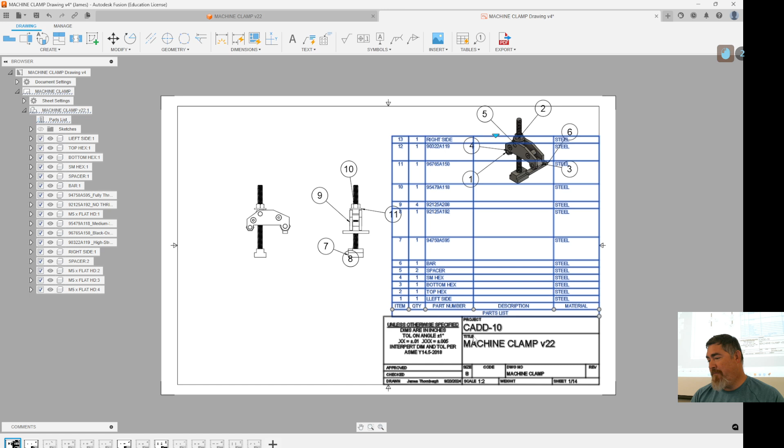But sometimes if you make your drawings first before you fix your components, your table ends up really big like this. So just click on it, grab the arrow on top, drag it down and drag it back up.

Then move this over a little bit and it'll collapse back down. Either that, or when you pick it, you have to pick on the line, make a new table, drop it in, and add that description column back in, and it'll scale back down.

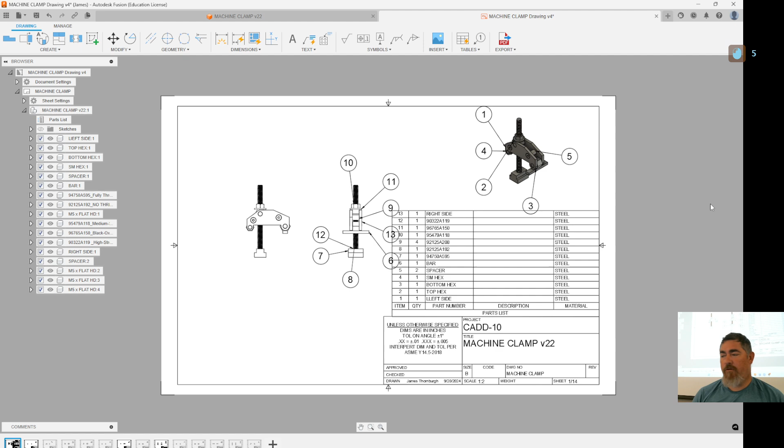So what are these little balloon things here? Those are, I think, the items. Yeah, so it's this item number and it's telling you where that thing is in the assembly.

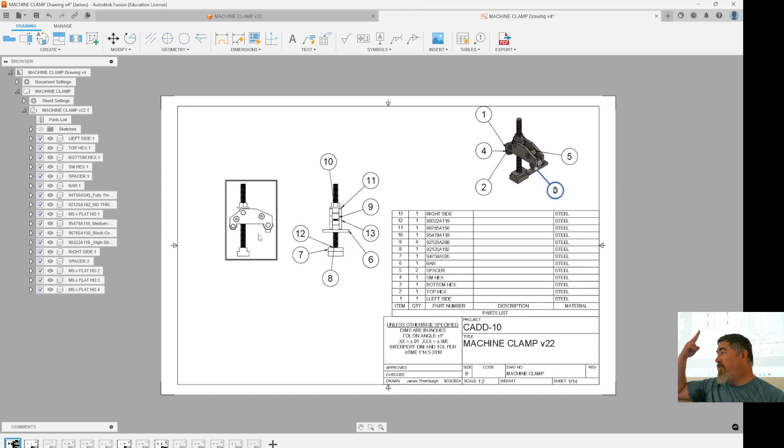And so we want to be able to see kind of an isometric to see what's going on with the part. Then over here, we also need the multi-view so we can see overall height, width, steps. So we need probably at least 2 views there. Maybe not that one, maybe this view.

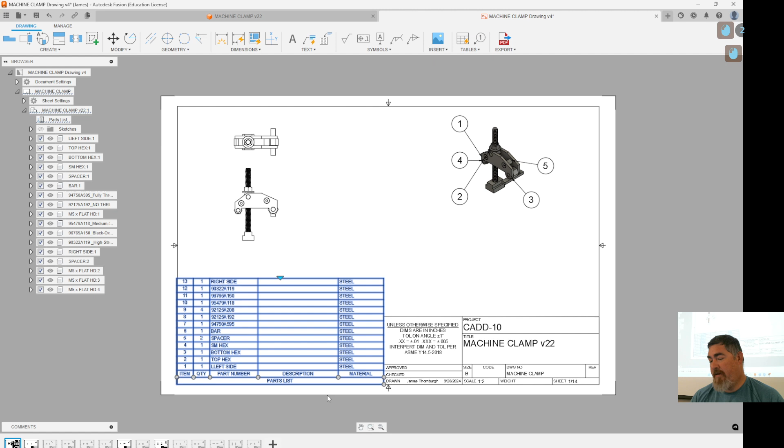I can stick these over here. But right now this is really small, stuck up there. I could also move these up here and drag my parts list down into here. I can stick it down there. Now I have more space for this.

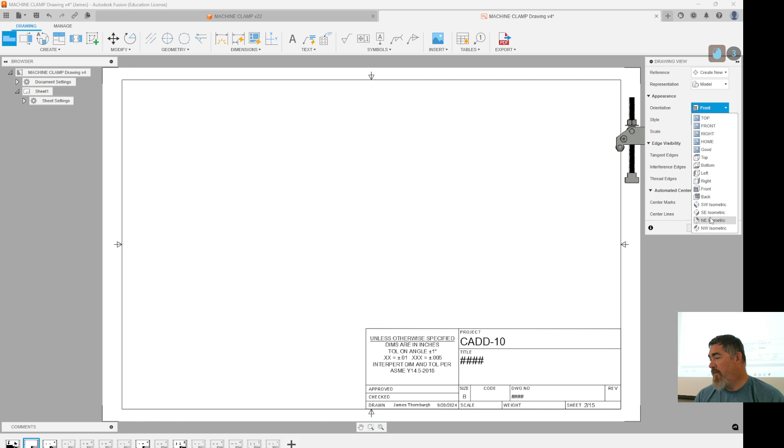I can also split these up, doing one page of just these views and another page of the isometric. Both pages would need to have the parts list though. So I could add a new page, drag it over there, do a new base view, and tell it I want only the isometric. Now I can make the scale bigger.

Put in my table. So now I've got a lot more space to work with.

So what was one of the problems you guys found when you were working on this with identifying your parts? So you have turned in your drawings.

Yeah, so it's hard to see some of these parts, right? You can't see these parts back here. You can't see what's going on over there. You can't see this bottom screw at all.

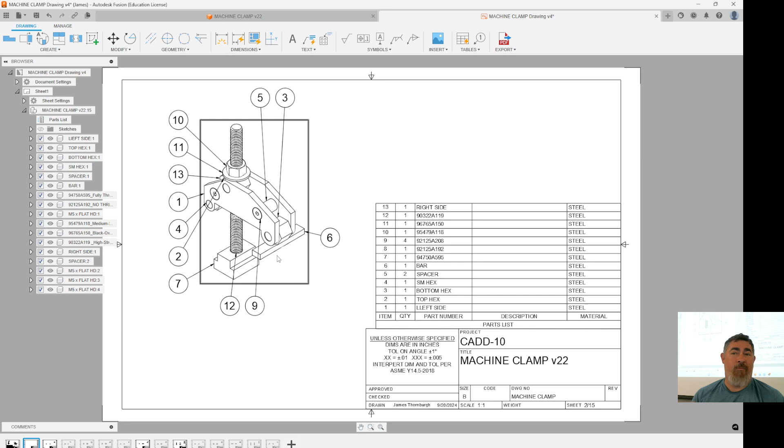What are some ways to fix that? Yeah, we've got these other views here. And instead of doing this view here, we could do a section there.

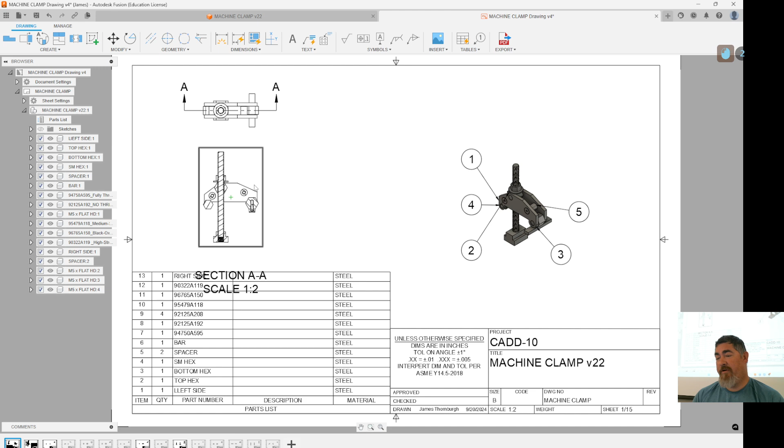Now we can see this screw, but we still can't see those backside screws. And we're not seeing it on the isometric.

We could do maybe another isometric, and now I do a southeast view, and I do it there. So now I can see that screw. So I could do that, look at it from the other side.

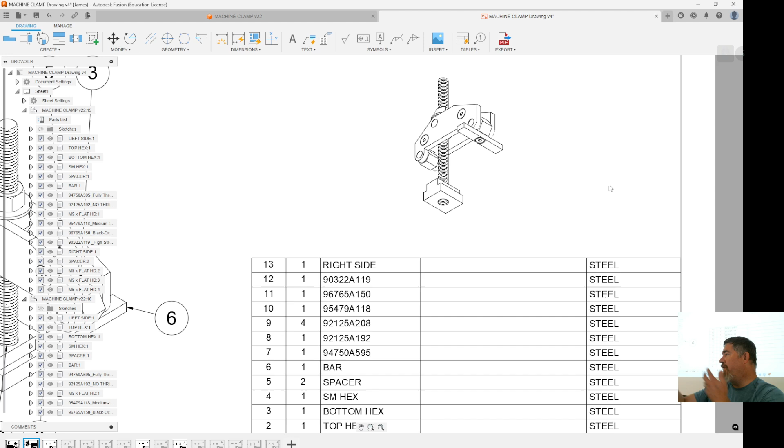What's another way that you've seen? I'm sure you've always seen where I'm going. So when you buy stuff that you have to put together, how does it show it to you? It shows you all spread out, right? Yeah, and wouldn't that be nice to be able to do that here?

Definitely, probably. So if we go back into our file here, right now we're in our design workspace, but remember we have all those other workspaces we can get to: generative design, rendering, animation, simulation, manufacture, drawing.

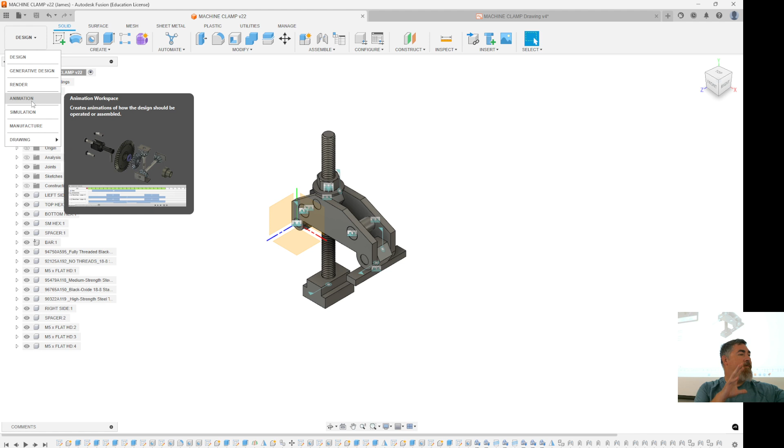So if we go to the animation one, look at that picture. Does that kind of look like an exploded view there? Yeah. So I go there, I'm going to open up the animation workspace.

And so I have my components. I have a timeline down here on the bottom that they call a storyboard. And so this is where I can make my animation. Next week we'll get into playing with it a little bit more.

And you might even just want to start playing with it a little bit here. But for right now, I just want to make kind of a finished view of what this looks like when it's all pulled apart. A couple ways we can do it.

I can click on transform, and I get auto explode all levels. So one level just means that it'll take this and whatever the top level component is, it'll spread those apart.

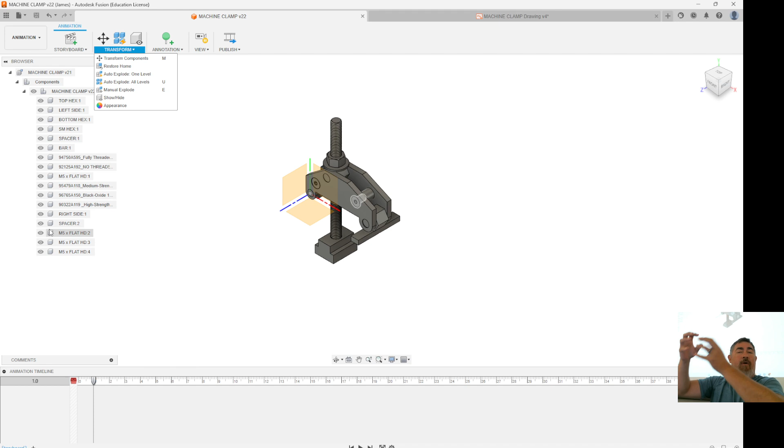Since this one we only have top level components, okay, but if we had a component within components, that would keep those groups together. It wouldn't break apart components into subcomponents. That's what all levels would do. So I just always do all anyway.

So click on that, all levels, and let's see what happens. You can use this little slider to adjust how far things are moving. But it's kind of okay, the stuff in the middle isn't so great. So we can accept it and then move some other stuff around if we want to.

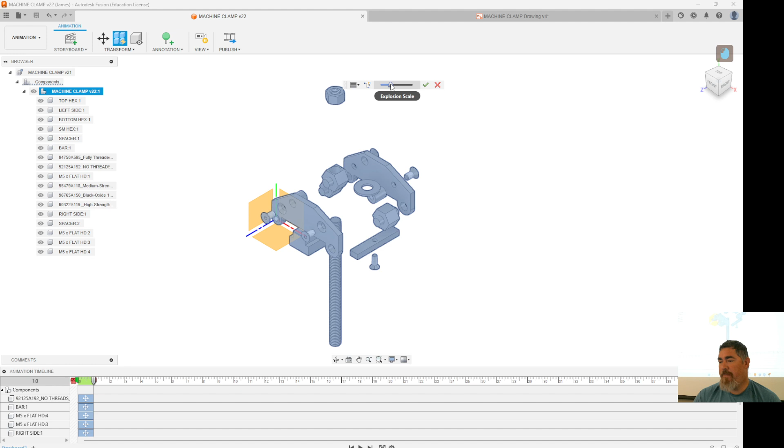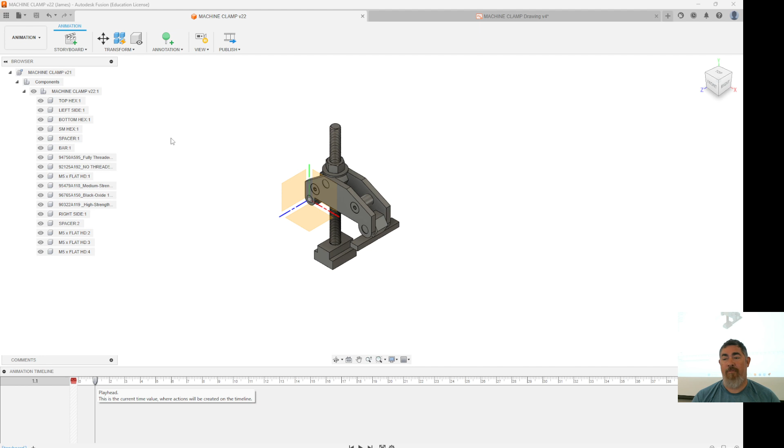I'm going to cancel this and just do it myself. So right here on the bottom, this timeline is where things are going to happen. Whatever I move is going to happen between 0 and where the cursor is on the bottom. If I say move, and grab that nut, that screw, the side, and that screw, and drag them out like this, hit OK, you can see it creates those 3 items down in the storyboard.

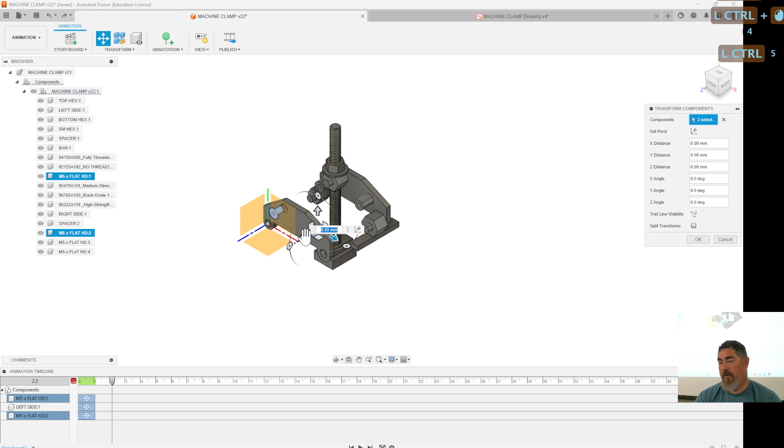Now I can hit move again, hold control, grab that screw too, pull those out a little bit more. Now those are all moving at the same time, to show you the animation side. If I want those screws to move after that, I can move it here, then go to move, screw, pull them out a little bit. Now when I play it, that comes out and then the screws come out after it. That's how the animation works.

Ta-da, that's the entire animation lecture. So you can do that if you want, or just do everything at one time for this.

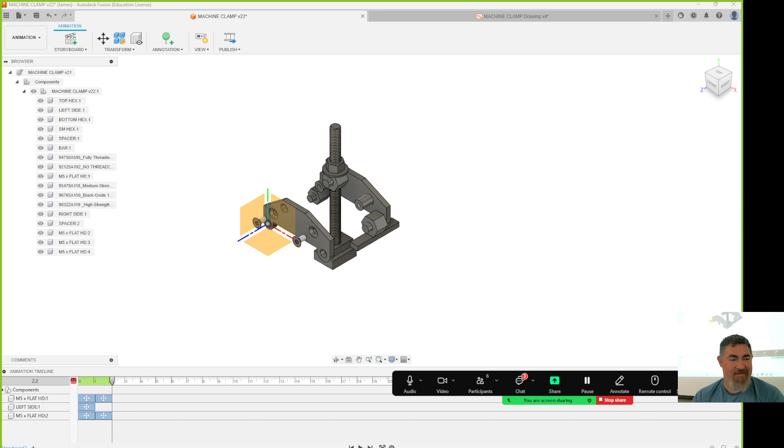Professor, can you share your screen? Oh, sorry. I didn't show you guys in here either. That's why we're all looking up there. All right, there we go.

So you can see the timeline down here, and as I drag it, it can move. I'm just going to keep it all at one time, to make it easy on myself right now, but that's something you can also play around with.

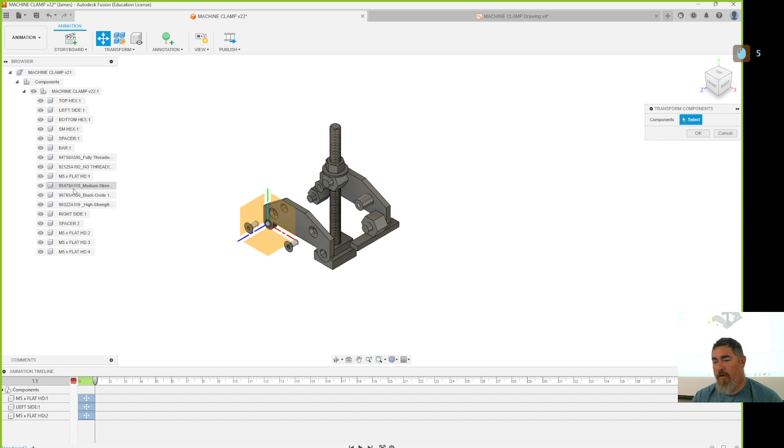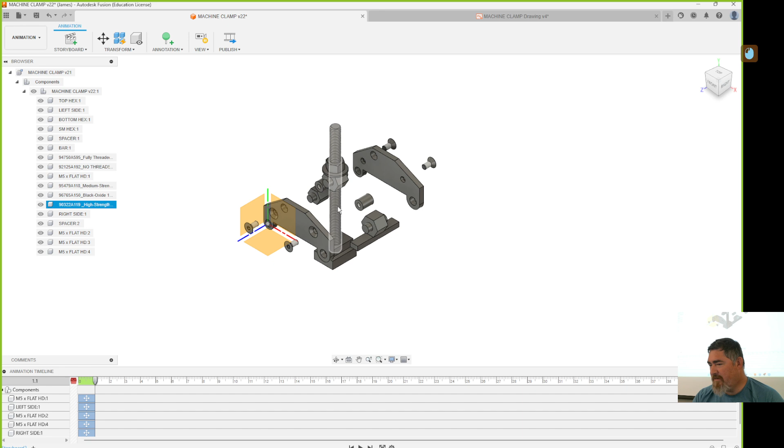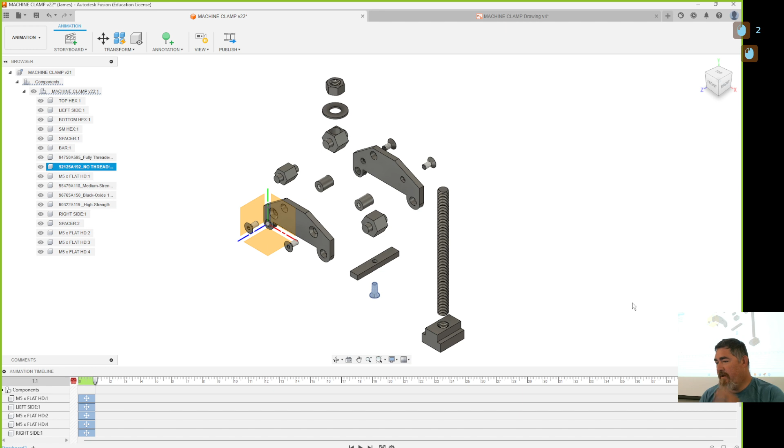I want to pull that down. Grab those 3, pull them up a little bit. Move that over a little bit. Now I can clearly see all of the things, right?

So I'm going to go ahead and save this here. And if I move this, you can kind of see everything goes in and out there.

If you want it to be able to move 2 different ways, you could pick them, and if at the same point in time I made it over here, now it's going to do that.

But you can also make multiple stops. You can make it go from this time period to this time period, move here, move up, and then move over, like that.

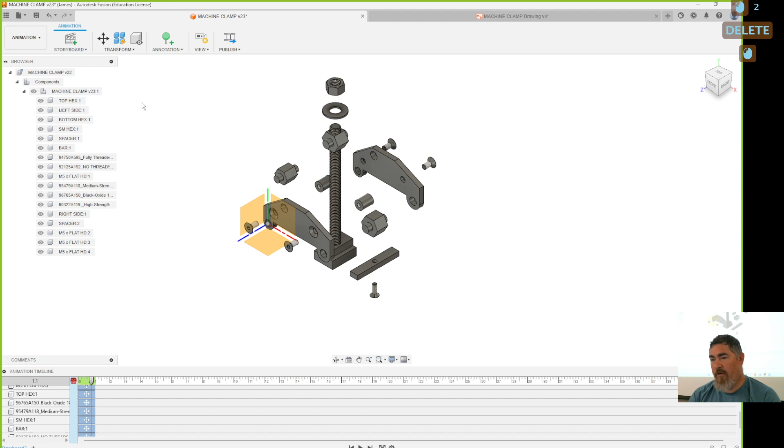So if I made, like on this one, on this, I can make those, this time period move down. Then over here, make them move again that way. Now it's going to move over and then up.

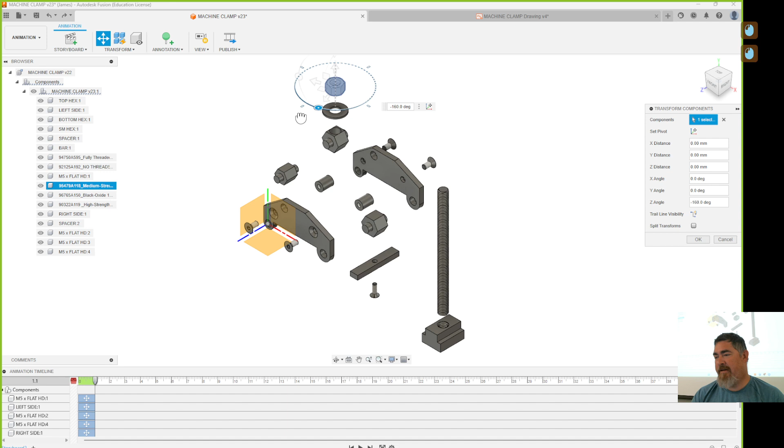You can also, in that move, have things rotate, so you can have things move and rotate at the same time. So to watch the nut screw on if you wanted to, I could grab this one here, and at that time period, I can just give it a couple spins. It can only do one, but now it's going to kind of turn as it goes.

So yeah, you can do all of that. It doesn't work with the mates, or the joints don't work, so you can't just tell it to rotate a joint - that doesn't work. This is more kind of a coming in and out.

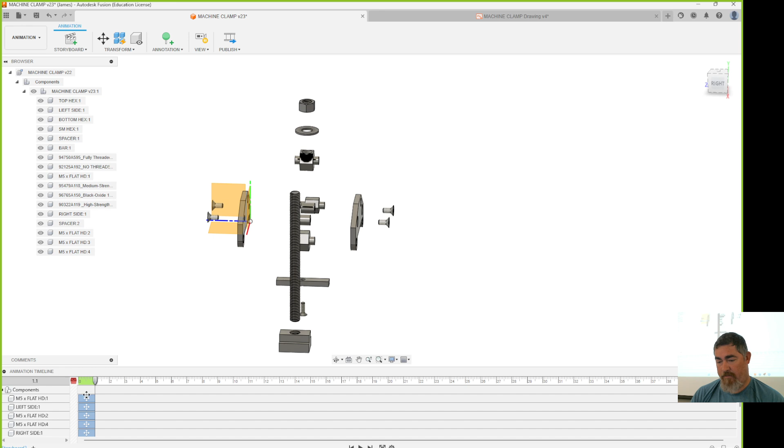For the animation part, you can also move your camera. So if you move your view... If I hit record on the view, if I start there, then go over here and tell it to be over here, now as it explodes, it rotates.

So you just have to turn on the recording for the view. You hit pause so it doesn't record where you're moving it, so that way you can kind of move stuff around while you're working. But then you can hit it there.

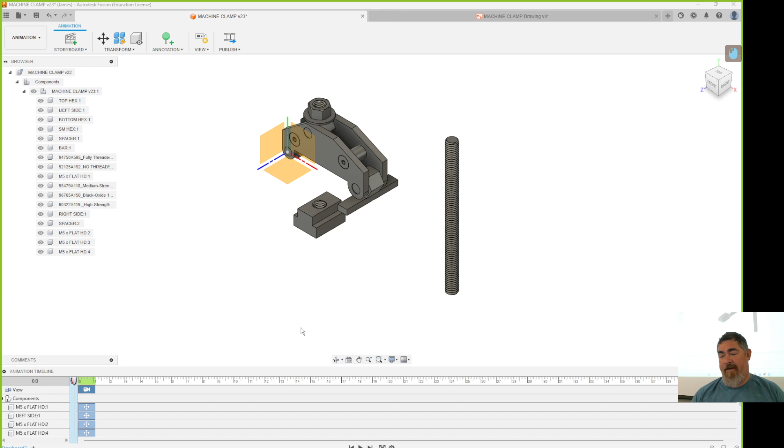This is over here because I had the cursor in this little red spot when I moved it, so that moved it there for the home position for where it starts. So you could be here, move stuff all around, and then at the end, tell it to restore home, and it would pull everything back together. So then your animation could be coming together.

You can also, in your publishing video, I think you can - in some other programs you can make it record backwards.

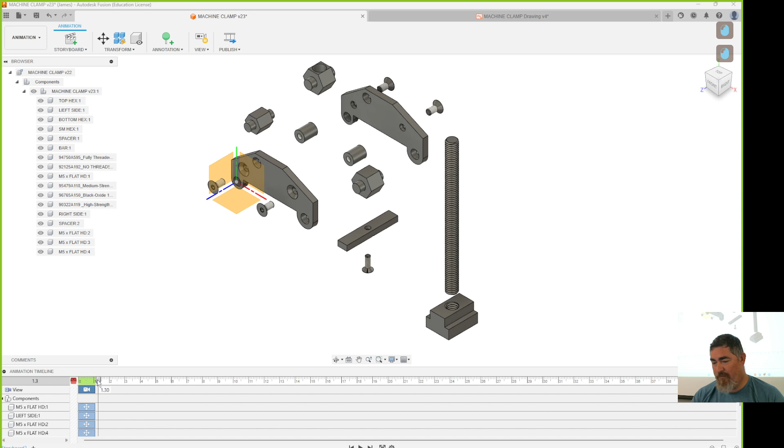So each marking a section, these are time periods - this is 1 second. So if I was going to play this, that's the animation. The spacebar plays the animation.

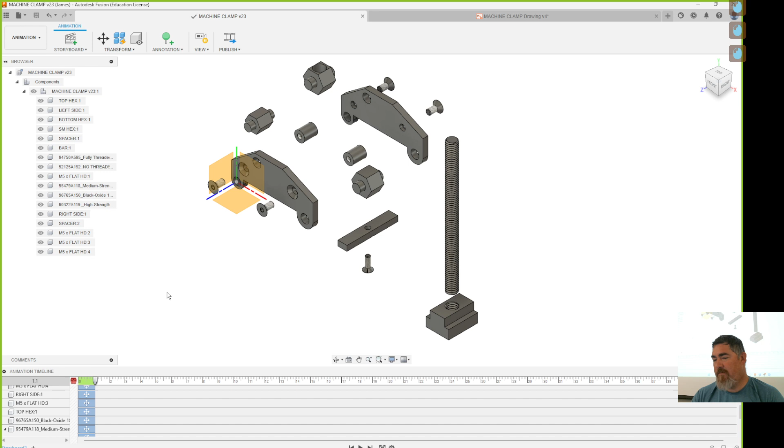So, but the main point is I want to get to this view here of everything pulled apart. And so now I save it. Go to my drawing, and I make sure I hit my refresh, and it redoes everything.

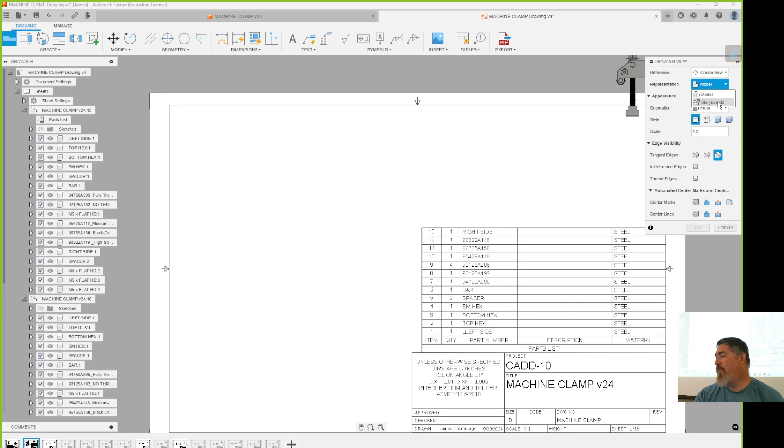And so now if I pick on this view, just delete that view, make a new base view, another representation. I'm going to pick Storyboard 2. Now it's pulling that view from that animation. Oh. You can stick that in there, and then I can tell it to do balloons, and I could pick on my pieces and add balloons.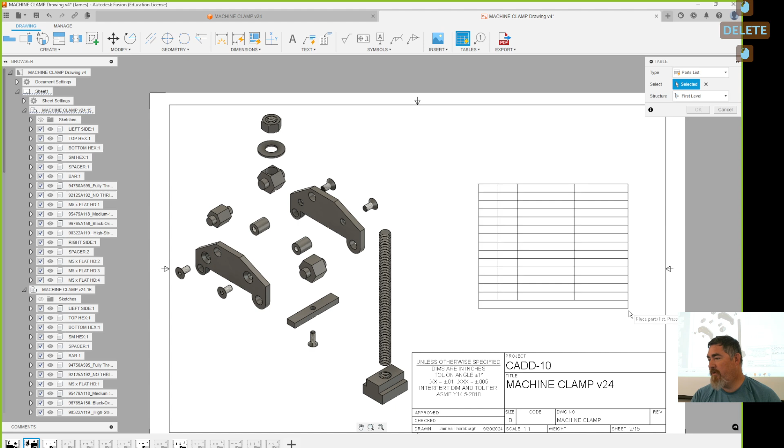Or if I add a table, will it do it automatically? There we go. So then that's a little bit easier than re-adding all the balloons. I just re-add the table. They all get there. Now I can go in and drag them around so they're nice. So just like before, we don't want to have leaders going straight across. We want them to be at some kind of angle.

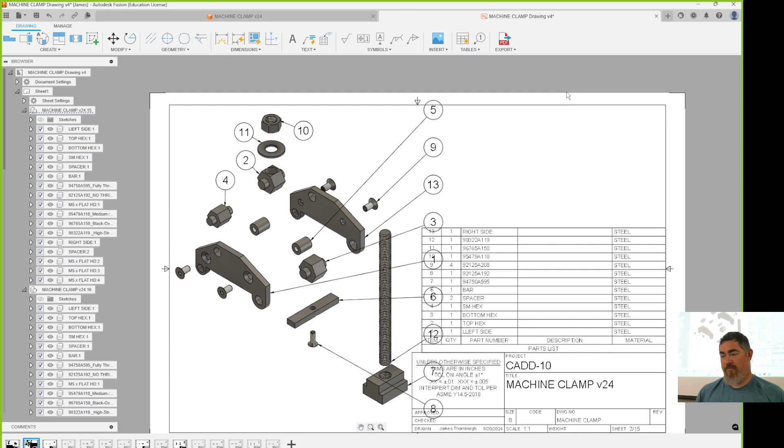And in this case, we really don't want the balloons to be crossing each other. But if you grab it and you just move it to a different point on the part, that's fine. Yeah. Unlike in the drawing where we had side notes, corners, chamfers, why don't we have them in the assembly?

Oh, because the part's already made, right? Okay. We've already made the part. We've already broken sharp corners and all that stuff. That's already been done. Yeah. So we don't need to say that here because that's part of making the parts. Assembly is just putting together. Gotcha. So we don't need that.

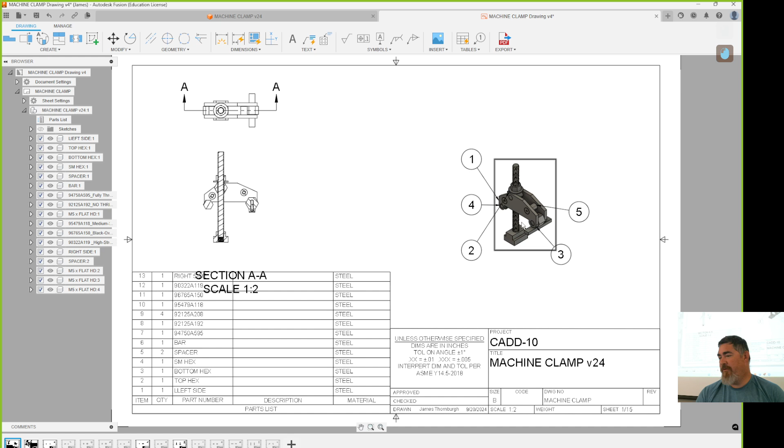So this drawing now, we could just get rid of that and just have only the parts list and these views or whatever we want here. We can make them bigger. Got that section name, whatever. Make them bigger here so we can see what's going on and have a different page with the exploded view. But yes, it does need to have its parts list too so we can see what's what on it. Okay, does that make sense?

Yeah, you don't want them to overlap too much. You don't want to do that. Oh, don't let the balloons cross each other. Yeah. But you can be creative with where you stick them, like this could go here, and you don't need to make it go to every little thing. If they're the same, you don't have to put an arrow on each one. Some programs will let you add multiple leaders to the same balloon, so I could say 5, go to this one and that one. Fusion doesn't let us do that.

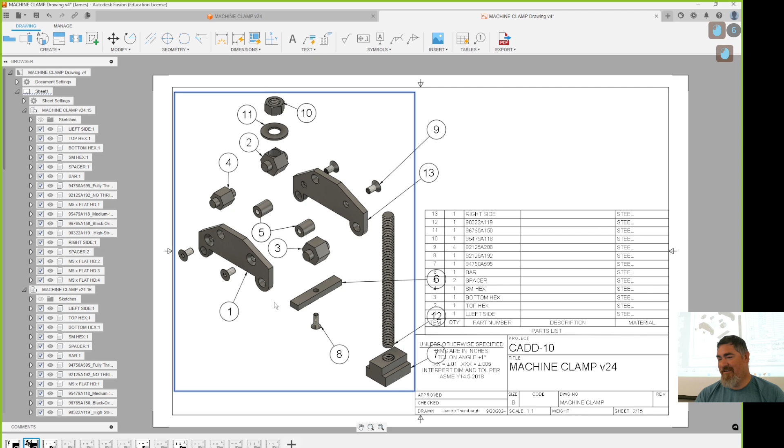I don't know, maybe. Try it. Let's try it. Go here, put a balloon, boom. Oh, yeah. There we go. 2 different ones, but it looks the same. Yeah, so that works. Okay. Helps. And they do snap right to the middle of each other, so that would be acceptable. So I can stick this there, stick that in there, this here, drag that over here.

Remember, if you're not sure if it'll let you do something, try it. The worst that can happen is it doesn't work, right? Right. But if it works, now you learn something. And that's how I've learned all of this. This whole program has been like that. Like, I've done it this way in another program, or I think this should work. Let me try it. Yes, it works. Great. No, it doesn't work. All right, now I know I need to figure out another way.

So that's actually the key of what you should be learning in this whole program: how to figure out what works and what doesn't work. Because even though here you learn Fusion, you learn SolidWorks, you go somewhere and they use some other program that's a little bit different, but mostly the same. Or even if it doesn't have the same kind of things, you'll know, okay, this is what I want to do. Let me figure out how to make it work.

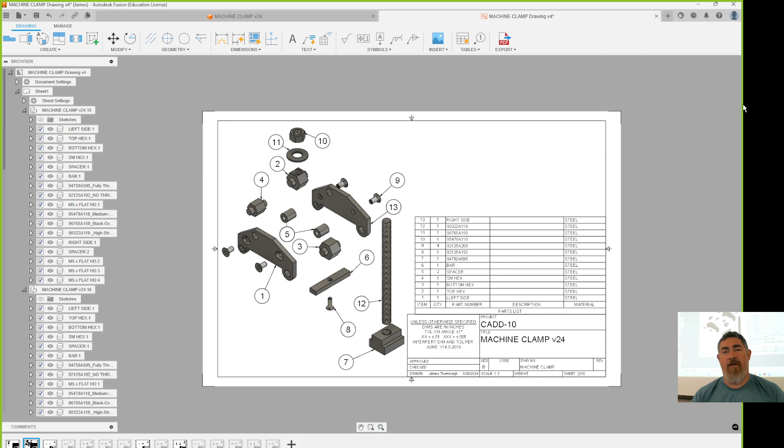Okay. So any questions on this? So if you've already turned in your drawings without this, and you just want to leave them like they are, fine. You don't have to have exploded views on everything. But if you want to do that, this is how you can do it. And you just resubmit it to the page. Okay.